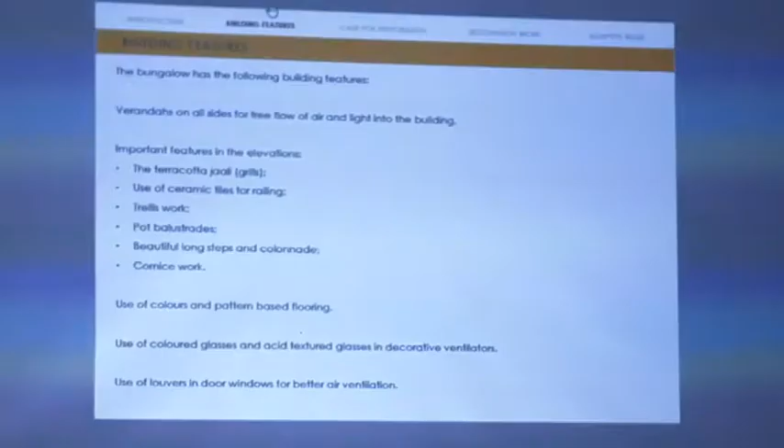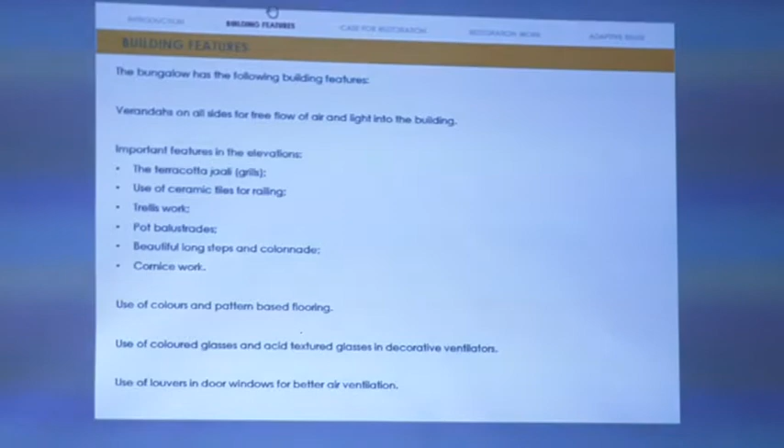Some important features of the building: there's a lot of interesting material used, like terracotta grills, terracotta jalis as we call it, which are the decorative features of the building. Then there are ceramic tiles used in the railing — those green colored tiles are also a very unique contribution. Then there is a lot of pot balustrades. I'll show you some more as I go ahead.

Then there are wonderful steps, colonnades, cornice work, and of course the lime plaster, which is an excellent material for such buildings. There are a lot of pattern-based, color-based floorings in the building which are very unique — you don't find them easily in this part of the country. There are some colored glasses, patterned glasses, and louvers in the windows which allow good ventilation from all sides.

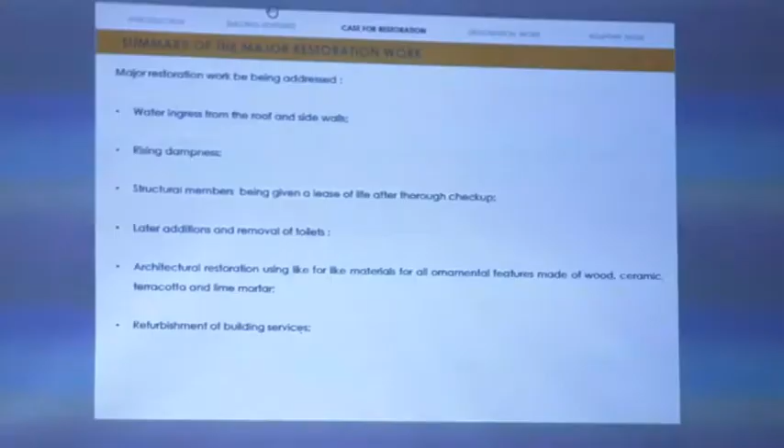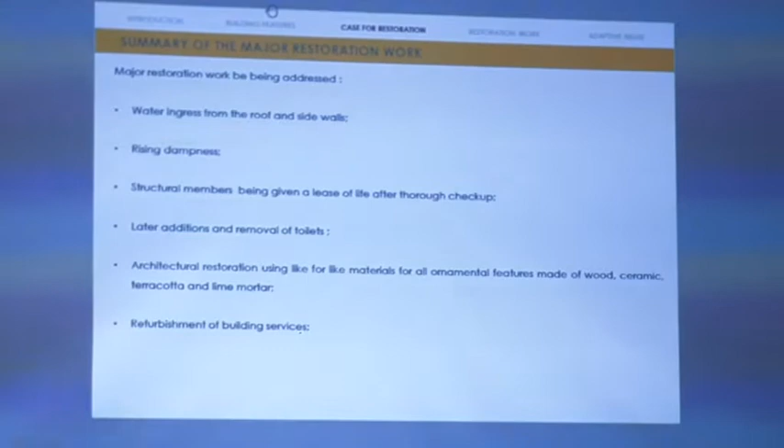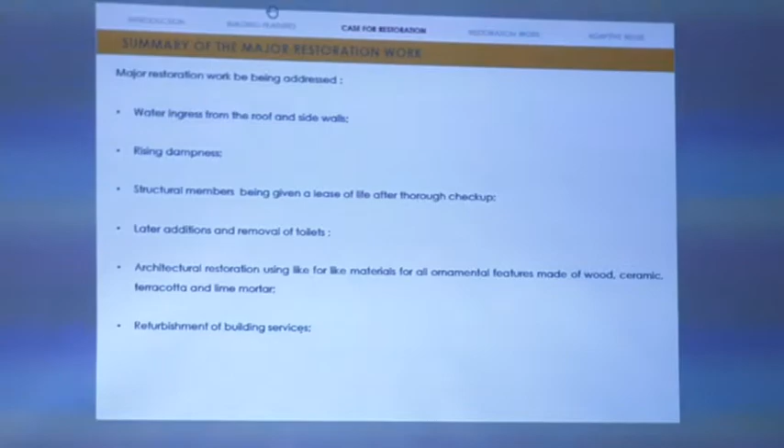So what are we doing, what are we addressing? We analyzed, we made a study, and we analyzed the problems shown here. There's water ingress from the roof and the walls, which is a very common problem if they are not maintained. And there's rising dampness, which is very commonly seen in Chennai, especially because of the clay soil.

In Madras Club also we have this problem, and many other buildings I've seen in Chennai have this problem. It is not a very easy problem to solve, it has no ready-made solutions. But we have to tackle this problem in a step-by-step manner, which we will try to do.

There are structural members made of wood and bricks, so these have to be repaired. I think the major restoration work was taken up in the 1960s — that was a major one, and we see traces of those works now that we've taken up the work. There are some steel additions, some RCC additions, a lot of things that we see. We don't know the exact dates, but there was a major work which has happened in the building.

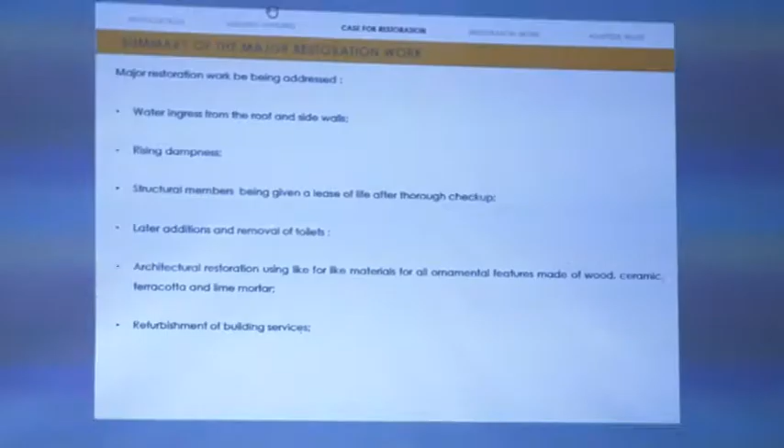There are some toilets which were added. Actually, the building was not designed to have toilets, but as you know, it was being used as a residential quarter sometimes, so some toilets were added and they were causing problems — extra load on the building, extra concrete. We are trying to remove the toilets so the building goes back to its original form, and we can shift the toilets to the next building, which is an RCC building. That is our plan.

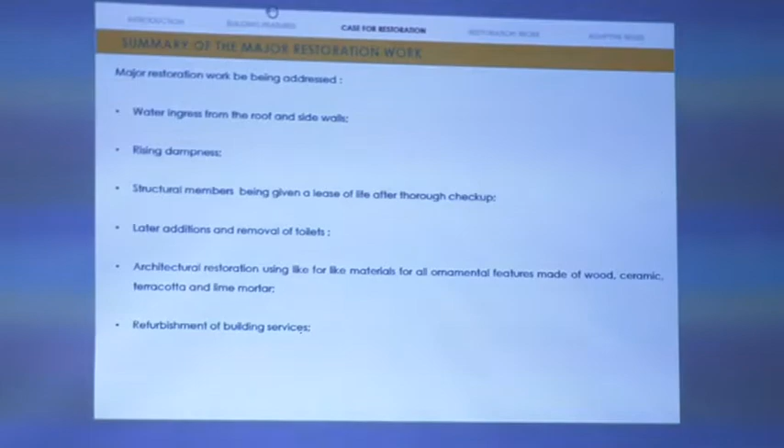And there are architectural features which need restoration on an as-is, where-is basis, like for like material. In conservation, we try to stick to the same material as far as possible.

Then, as we all need these buildings, we need the utilities. So electrical, plumbing also is a major work which is happening, and that depends on the use of the building which is going to happen. There is a use plan which has been made, and accordingly the work is happening.

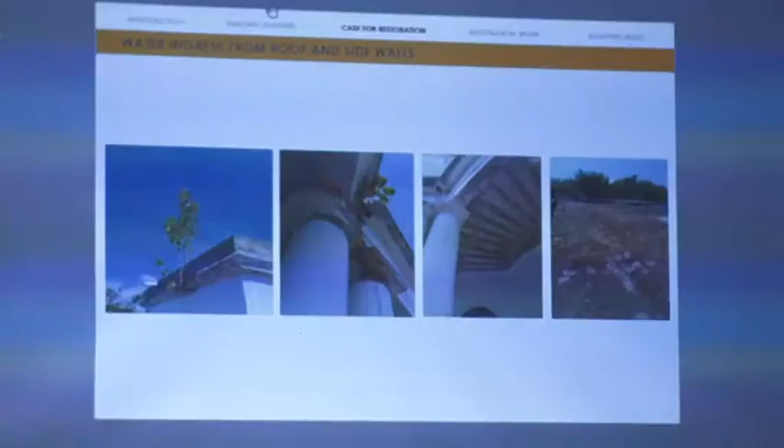So these are some of the problems. When we went to site, we found vegetation growth, which is also a cause of water ingress. The tiles on the terrace are broken, they are leaking, and there has been a lot of work happening on the terrace. I found a record where it says in the 1960s there was some bitumen applied on the terrace. So a lot of work has happened on the terrace which we don't know about until now. When we open up after 15th of January, we will know exactly what work has happened in the past on the terrace.

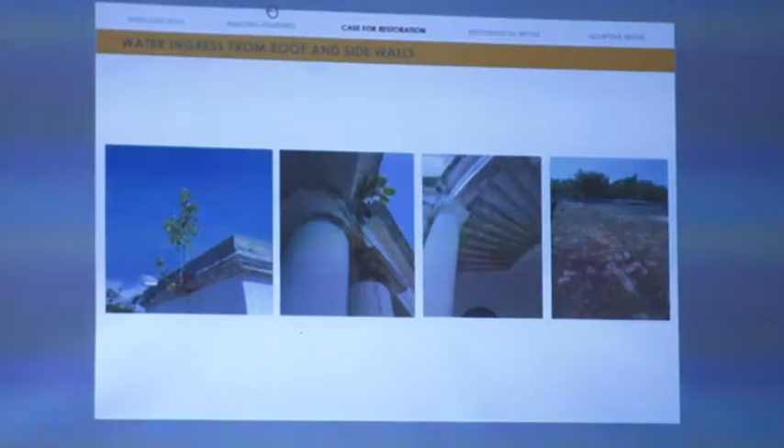These are the water issues which we have to handle — stop the leakages from the walls, stop the leakages from the roof. This is a major work, and we have not yet started the roof work; we will be taking it up after 15th January. But we have started the structural works.

This is one more issue I told you about. Rising dampness is not an easy problem to solve. This requires a manifold approach. We have to take a number of steps, and we are working on the issues. We have to collect the rainwater and take it away from the building - that is the crux of the issue. And if the problem still continues, then we have to find some more solutions.

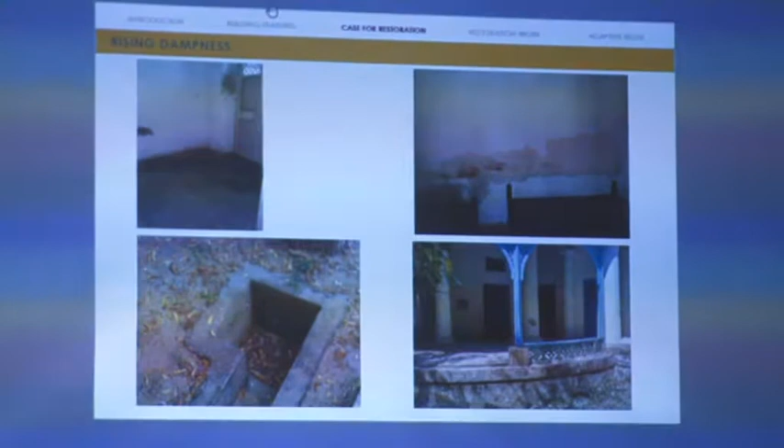There was cement plaster added, which caused a lot of trapped moisture inside the walls. Trapped moisture looks like a simple thing, but it's not at all simple, because it weakens the walls - the pore pressure weakens the bricks, and thereby the bricks give away, and the structure itself fails. There is an example in Pondicherry where a building recently collapsed - it's called the Mary building. One of the reasons was this kind of dampness continuously happening in the building.

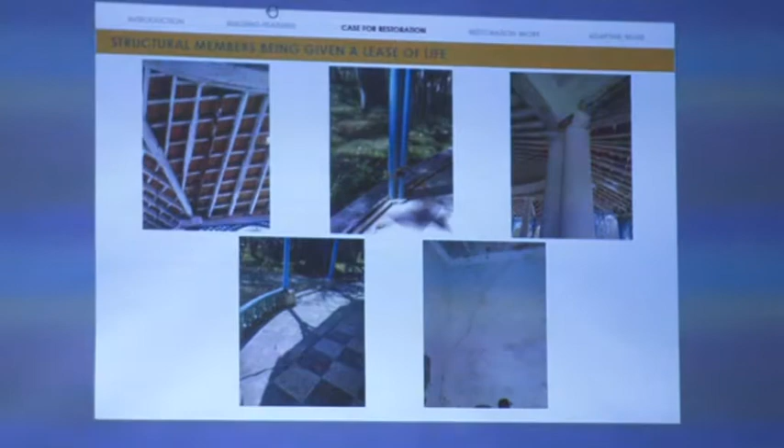Now, the structural members - the work happening right now - we have been replacing all the bad members and repairing them based on conservation principles. These toilets we are trying to remove, and we are trying to get the building back to its original shape.

There is a balcony which was added later. It's a timber balcony with steel members, and we had to remove it because it's not part of the original design.

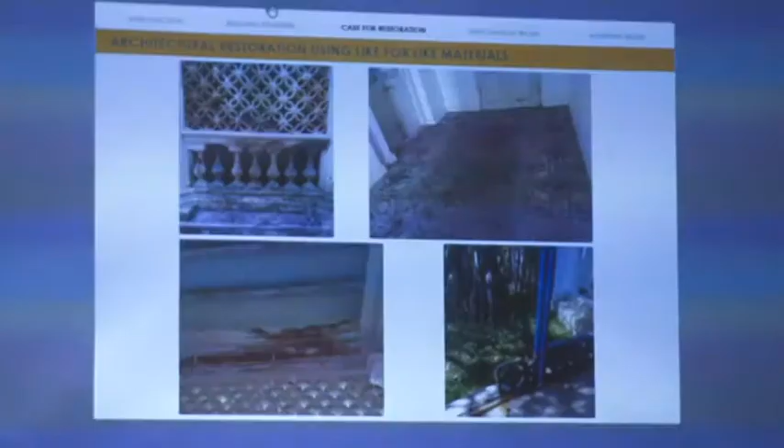Then there are these architectural features that are very unique to the building, and we are trying to restore all of this. These are the utilities, the toilets I mentioned, and we are trying to shift the toilets out of the building into a new RCC building which can take these kinds of facilities.

So these are the steps that have been taken by us. And during the course of the work, we found the foundations also required some strengthening.

There was soil consolidation required because the structure added behind the building - there is a porch behind the building - was not made with the original building. Of course it was added later, and the foundations were not sufficient enough to take the loads. So we saw some signs of cracks and settlements when we started the work. That part of the work we handed over to experts who can handle the soil consolidation - he'll be talking about that.

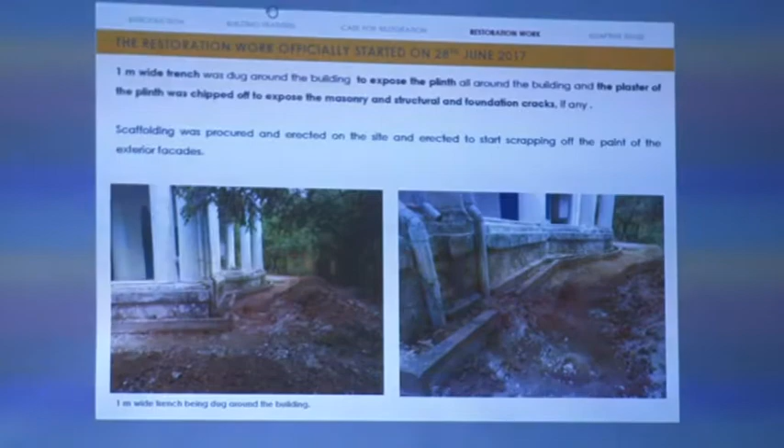So this is our approach to restoration. We'll go into details now. Work was started on 28th June. We started by removing all the extra soil that had gathered around the building, so as to expose the plinth as much as possible, so it can breathe easily.

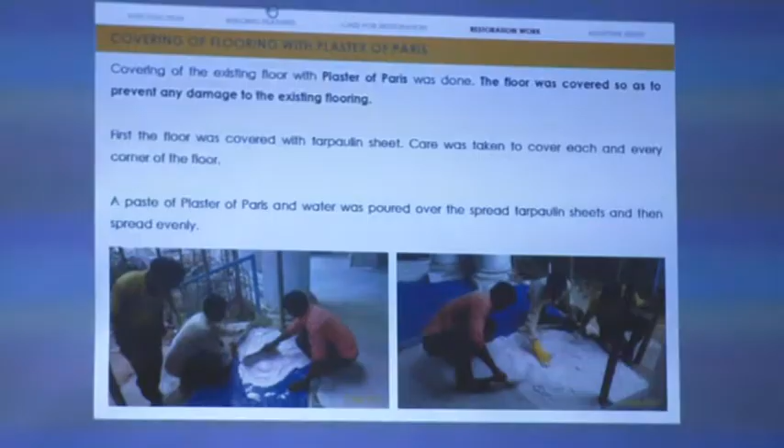Now, when we take up an old building, it's like handling an old man - it has to be handled very carefully. Basically, it's a kind of surgery that we are doing, so a lot of precautions have to be taken. We try to cover up all the old precious material and preserve it so that we don't damage it during the course of the work.

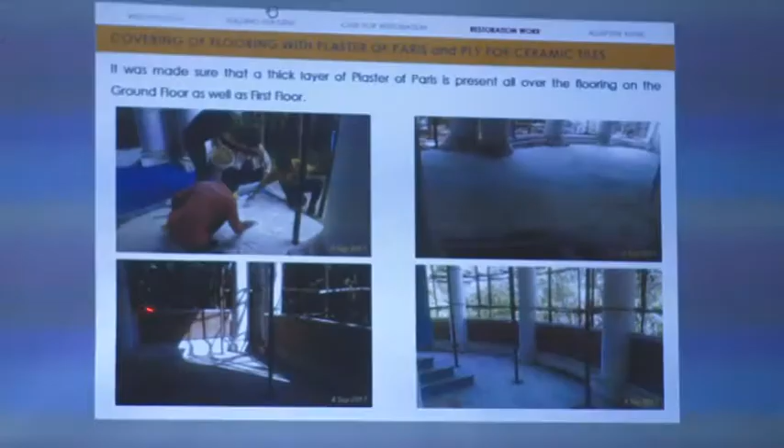So some of these things like POP, we put on the floor to protect it while working. This plywood is meant to protect the ceramic tiles, which are very unique and an example for the country. So we are trying to see that we don't damage the building further while working.

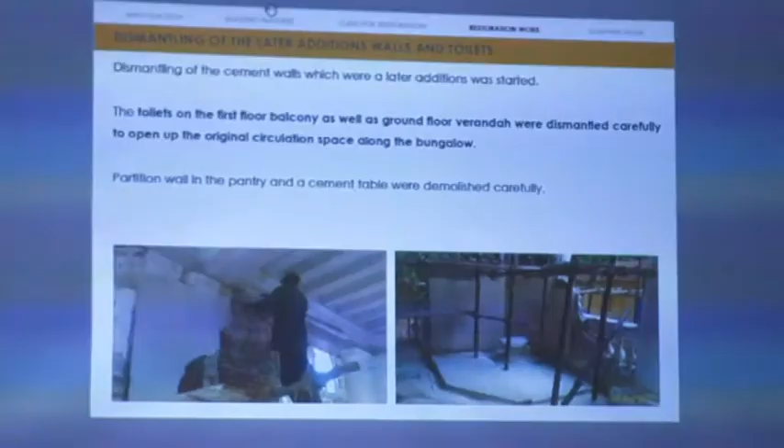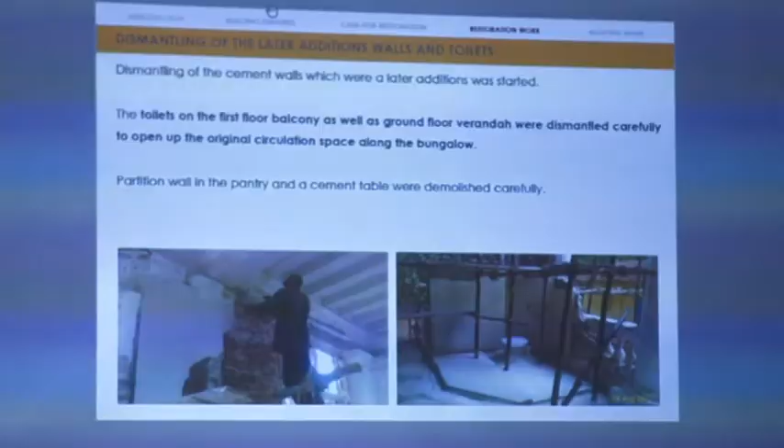These are the toilets and extra walls which were added because it was used as part-time accommodation. Unnecessary load was there - a lot of brickwork, tiling, concrete. We removed all those things. Now the building is back to its original form.

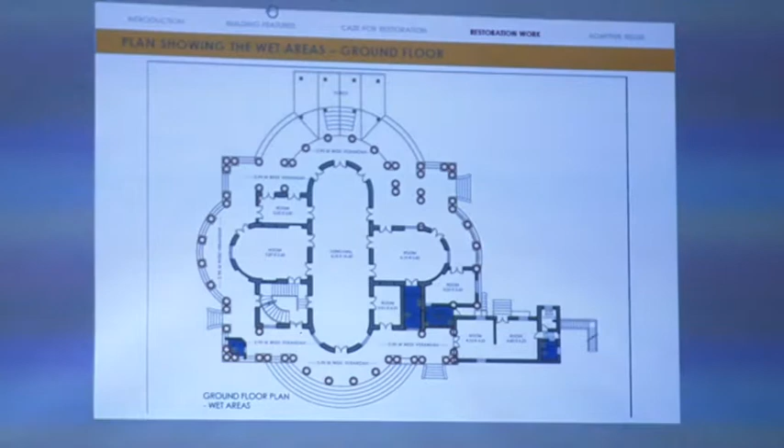See, these blue things you see are the things on the ground floor that were added - the toilets. They were stopping the circulation of the building. Actually, the veranda is connected on all four sides, but due to these toilets, it was blocking all the ventilation and passages. So at present, we have removed that, and now there is good circulation - it is back to its original form.

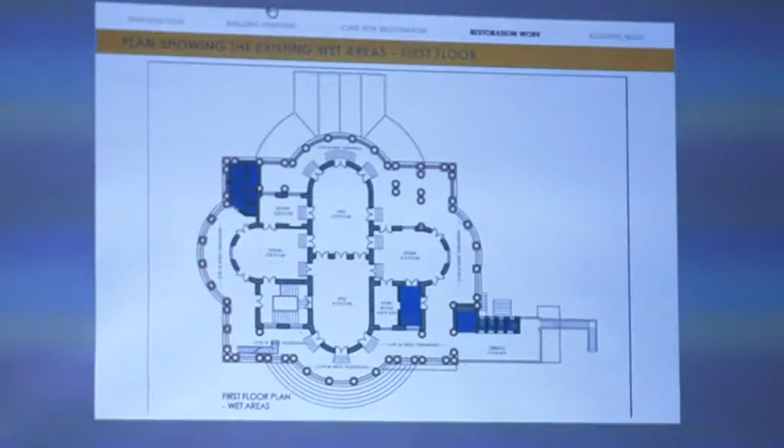This is on the first floor, there was a toilet here. And this is the block I was saying we'll shift all the toilets to this side. So we have removed this, and now the building is back to its original form.

Now there were some cracks, as I said, on the rear side where that porch was added, and the foundations were insufficient. So we had to stitch the cracks by inserting granite lintels. This is one technique to stitch the masonry, and grouting under pressure with lime-based slurries, so that the wall and the plinth is consolidated, and the soil has to be tackled now.

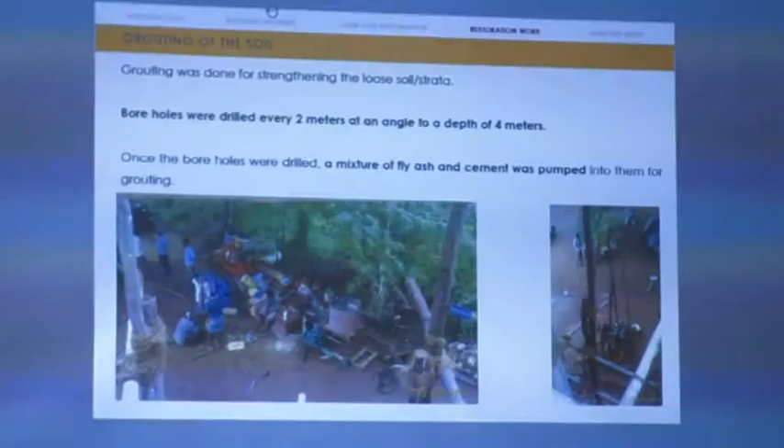This is the soil consolidation work which happened, and Mr. Narasimhan knew a few experts in Chennai who could undertake this soil consolidation, so he'll speak about it. That is also a very interesting thing which has happened in this project. He has been with us as a project consultant right from the beginning, coming almost daily, maybe thrice a week, and has been guiding us quite a lot. So I'll request him to speak a few words about this grouting and consolidation of the soil.

Good evening, ladies and gentlemen. This building, when we came and saw it, and started removing the unwanted material all around, and then looked at the plinth, we found a lot of vertical cracks in the plinth area towards the foundation.

To ascertain how deep it had gone, we dug in several places up to the bottom of the foundation and found that the cracks were going directly up to the bottom. Of course, those cracks were stitched and repaired by Mr. Nilesh Thakkar, who showed that granite slabs have been inserted and done.

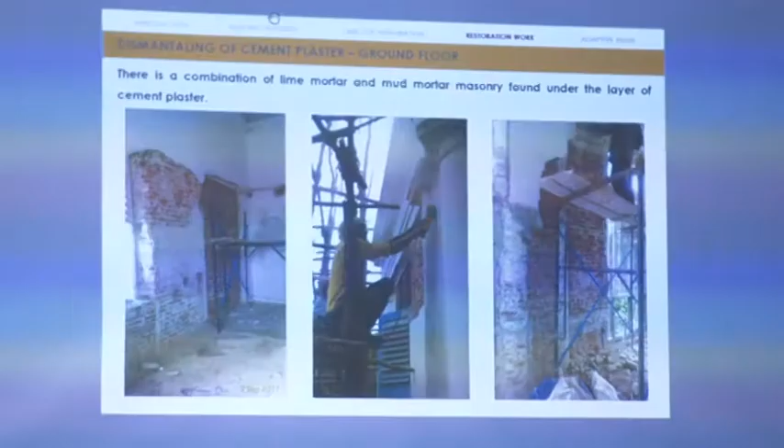So we had to carefully cut the plaster before removing it, so that there are no vibrations to the old building. So these kind of small things, they do matter. See, he's cutting the plaster with a machine, and then only he is chipping off the plaster. This avoids vibrations on the building.

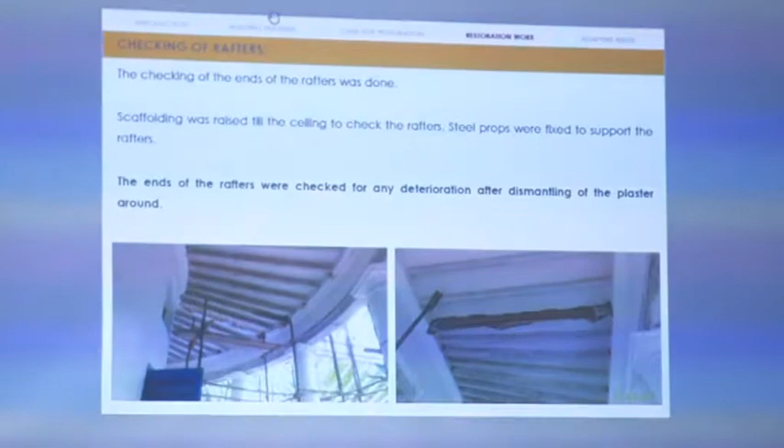Now we come to the wooden rafters. A lot of rafters in this building were not in a good shape, and we had to replace a lot of them. So we had to check each and every rafter. There is a wooden rafter, as you notice in the ceiling, which transfers the load to the wall and the pillars. If this is not in a good shape, there are chances of collapse. Of course, 1 or 2 here and there doesn't matter, but if there are many which are failing, then there's a good case for collapse.

So we had to check each and every rafter. We went about opening all the rafter ends on both sides to check whether there is wood rot happening. If there was no wood rot, we had to leave it alone. If there was wood rot, we had to do some things which I'll show you. And we had to also do a hammer test on the rafters to check whether the rafter is in a good shape or not. So these are some of the things that we had to do to take care of this.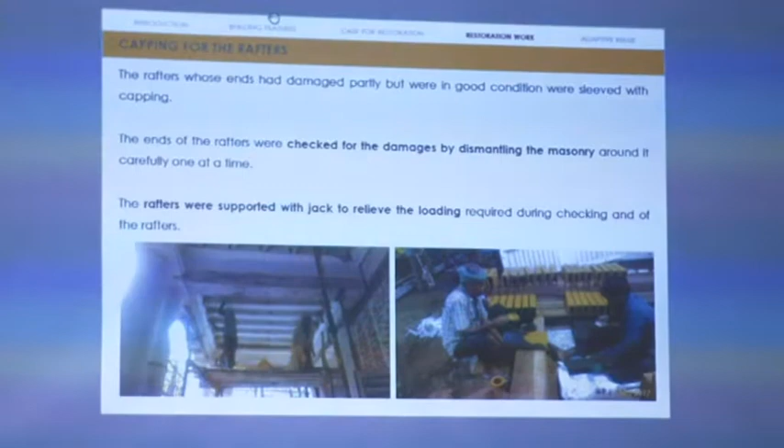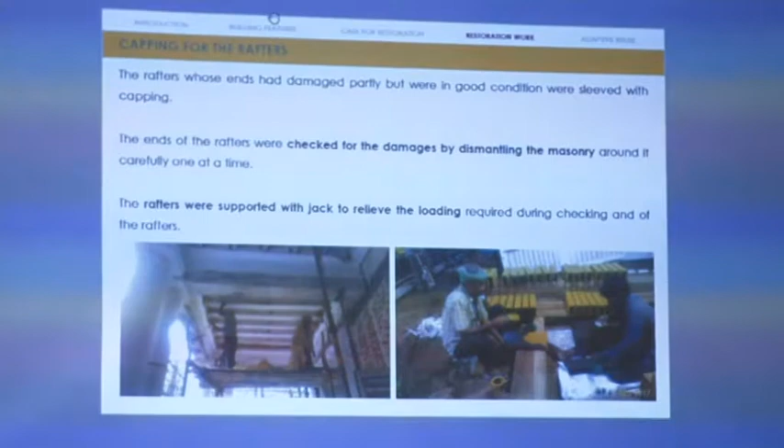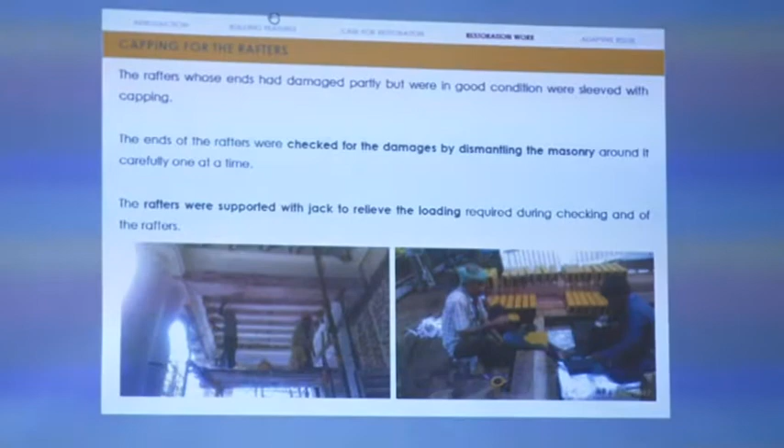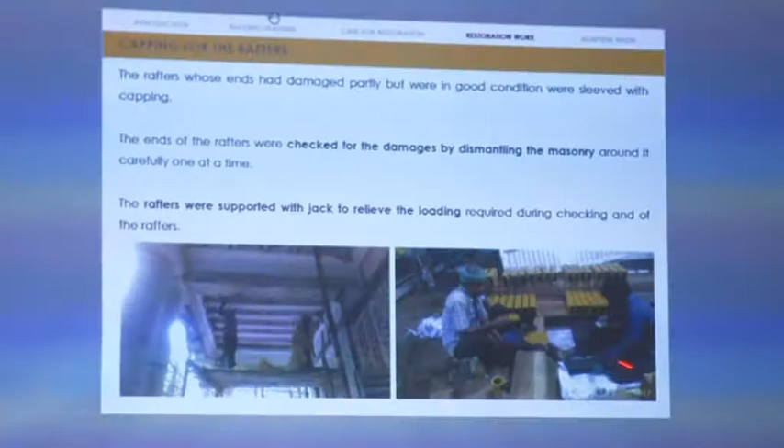See, this yellow thing that you see is a sleeve which we insert if the wood is rotted at the end. Why should we replace a rafter if the end is only rotten and the rest of the rafter is good? Let's say 80% of the rafter is good and only 20% on the end, which is usually the case because moisture in the walls attacks that end only. So this is a very nice technique to save that rafter. We insert a sleeve at the end, as you see it here. This takes care of the structural part - it transfers the load onto itself.

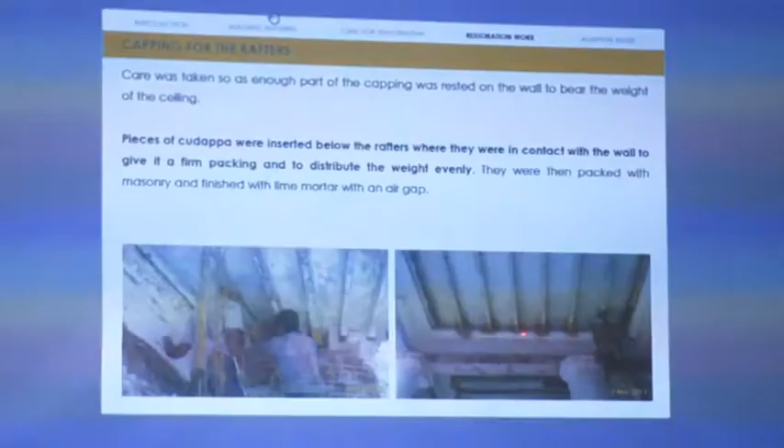And we also leave an air gap, as you see here. After the sleeve is fitted, we leave an air gap, whether it is wood or steel. It should breathe, so that if there is any moisture coming near that rafter, it should come out or evaporate. So this air gap didn't exist before, but we have introduced it and it works well.

So this is one of the techniques, how we have repaired the rafters. The other technique is, of course, if the rafter is bad, we have to replace it 100%. We cannot save anything from the rafter, then we have to go for a 100% replacement.

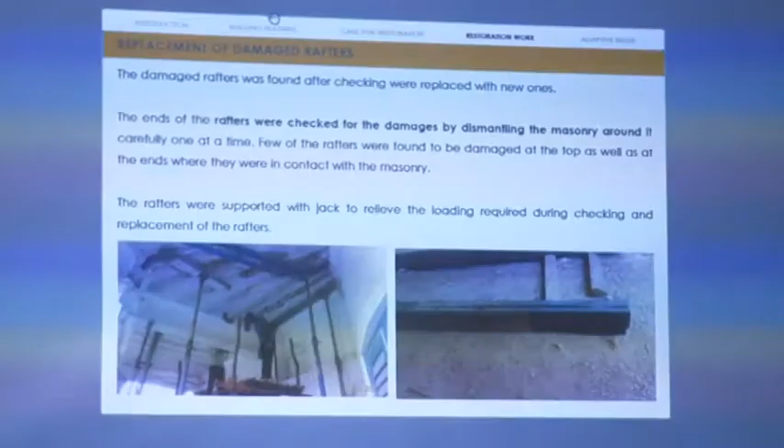This is the third technique that we have used. Let's say if the rafter is 50% gone and 50% is good, what do we do? We try to recycle that 50% by connecting it with another 50% rafter. This is what has happened here. It's a traditional joint, Kerala style. Our Kerala carpenters are very good at this, and it doesn't require any nails or screws or anything. It is just joined to another rafter which has been dismantled. So we try to recycle as much old wood as possible so that we don't spend more money buying wood. Each and every piece of wood is recycled back into the building.

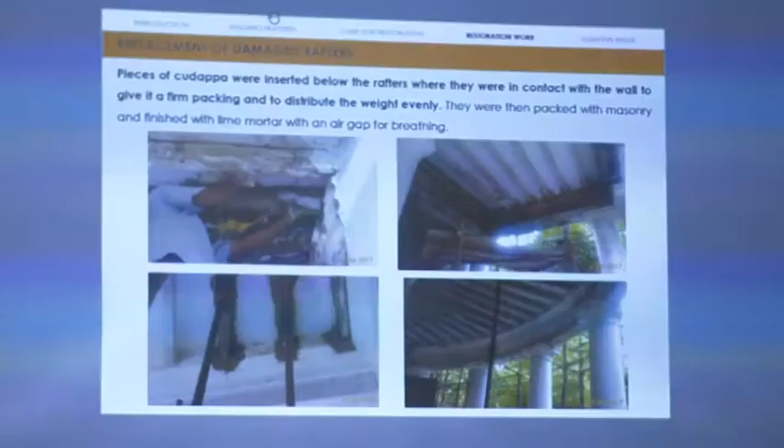And we insert one cudappa piece. As I told you, we leave an air gap, plus we insert a cudappa piece. There he is inserting that cudappa piece below the rafter, which is another precaution we take so that the brick doesn't get crushed below the rafter.

Now the restoration of the wooden beams. This was a major challenging work for the building as such. Replacing a rafter is very easy, but replacing a wooden beam of this giant size has to be lifted and put over there. So it's a very challenging task, and some of the beams are not even straight, they are in an arch shape, in a circular shape.

Our carpenters are good at handling all this. This is the circular beam I was talking about. See the condition of the old beam? This is the condition of the old wood that we found.

I have an account of how many beams and rafters have been replaced. I will show you.

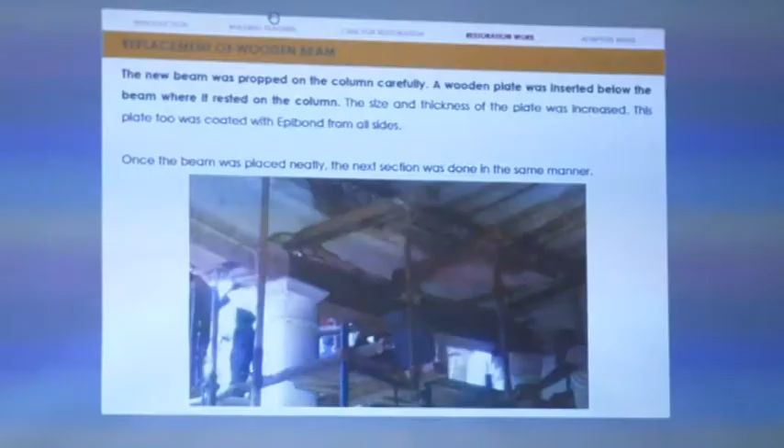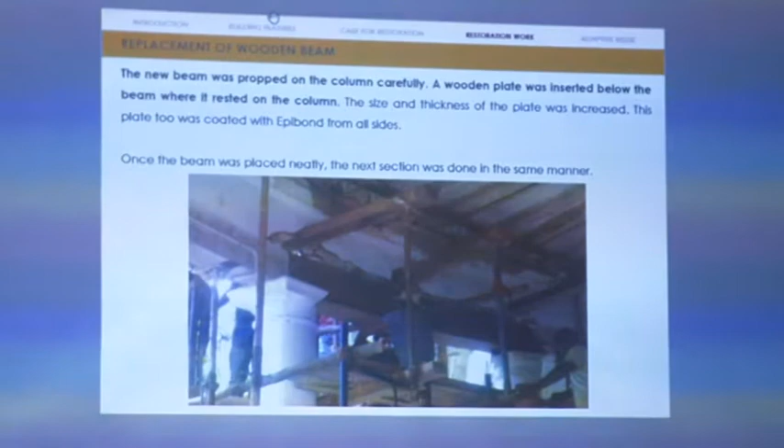Of course, all this wood has to be treated with anti-termite and painted at the end so that it does not absorb moisture. We apply a bitumen paint where it comes in contact with the wall and the ceiling. So these are some of the extra precautions.

These are very interesting things. You don't see these easily in old buildings. It's a very unique thing here. And these balustrades also are very unique that you see.

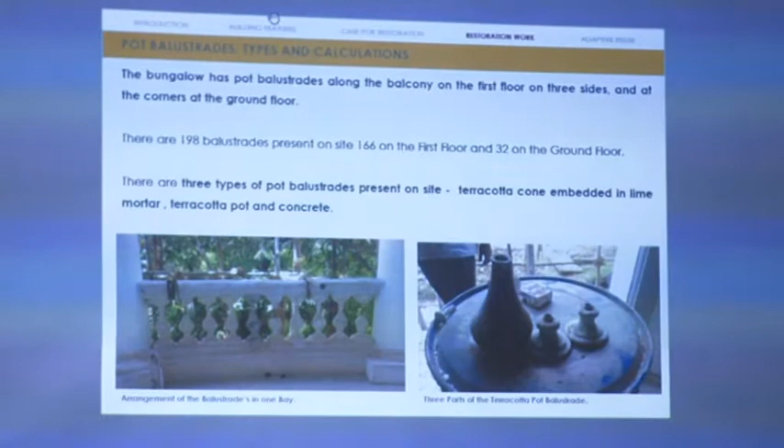There are 3 varieties, and we had to select which variety we should restore. So we found the majority of them had this terracotta insertion - a terracotta double cone inside the baluster. This is one variety we found, but these are the major ones. So maybe these are originals, and this is then plastered with lime.

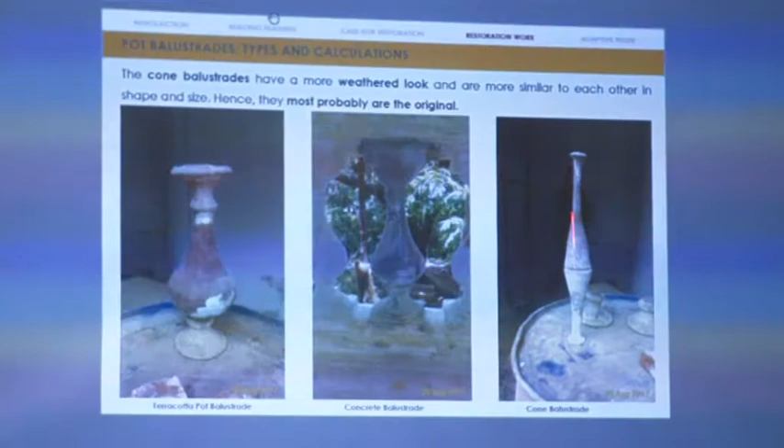So we chose to go for this variety, and whatever restoration we are doing is in this style. This is the baluster work which is happening - it's all lime mortar, coir ropes, and terracotta. These are the terracotta grills which are being restored.

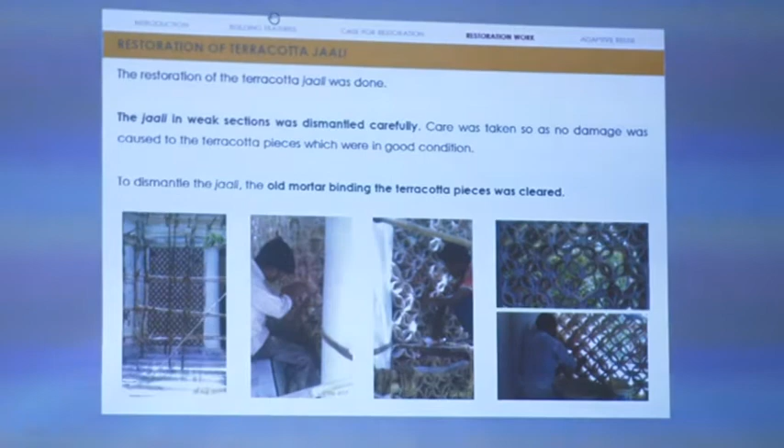Fortunately, we didn't fall short of any terracotta grills. We could recycle most of them.

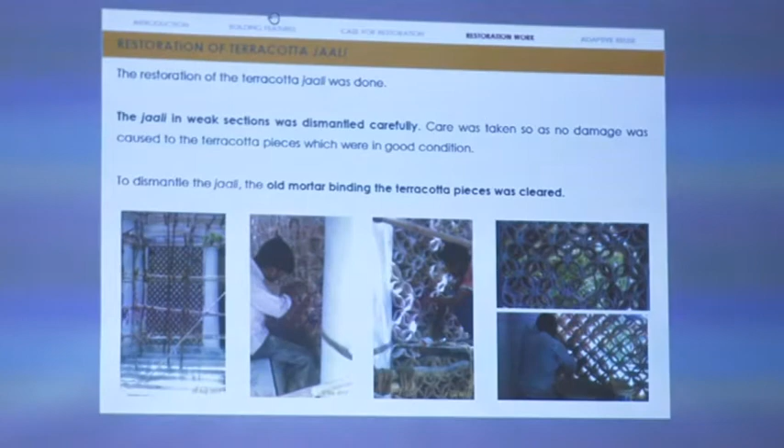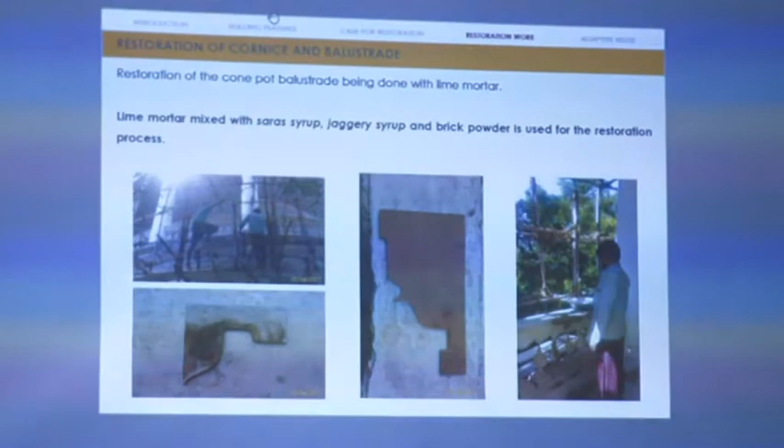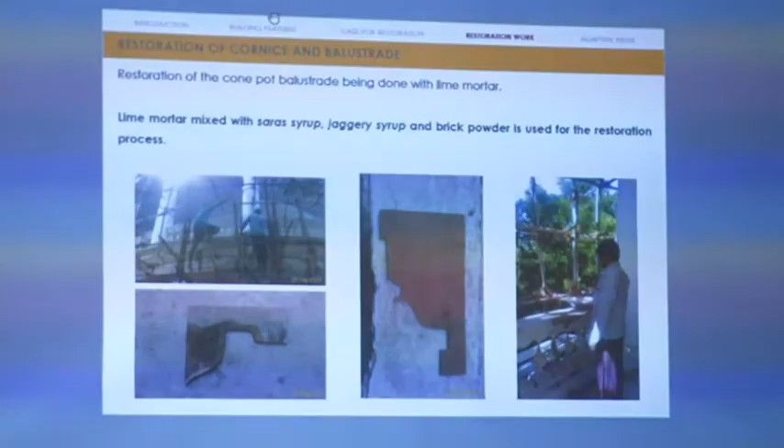These are the templates that we make for creating some cornices and moldings in lime plaster. This helps us in retaining the exact shape of the lime plaster. And this is how the lime plaster is made.

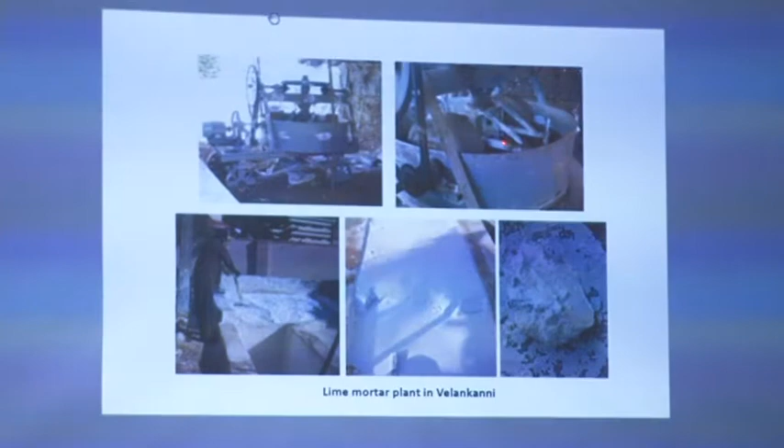We have a plant in Velankanni where we are working on the Velankanni church. This is a grinder which grinds the sand and the lime, and the lime is prepared in this fashion. It is slaked under water, it is filtered, and then it is put into the machine. This machine, depending on the use, takes almost 15 minutes to make the lime mortar, and then there is a process again before using it. But this is the basic technology.

In olden days, this is how people used to make it. We have one more plant in Anegundi near Hampi, which is bullock-driven. So that's a real old-fashioned lime mortar machine we have. That makes a better mortar actually than these kind of machines.

We have not started this yet, but I'm showing you that we will be doing this kind of traditional waterproofing using lime and brick pieces on the terrace. It works very well if it is protected with clay tiles, and has a much longer life than cement waterproofing. So this work is yet to happen - hopefully it will happen during the month of January.

So these are some of the works that we are doing, and we'll be doing much more, but right now I don't have any slides to show that. If you have any questions, I am happy to take them. Thank you.

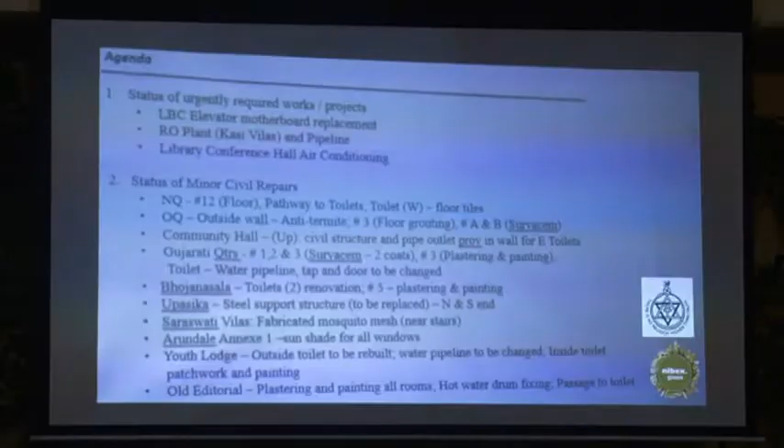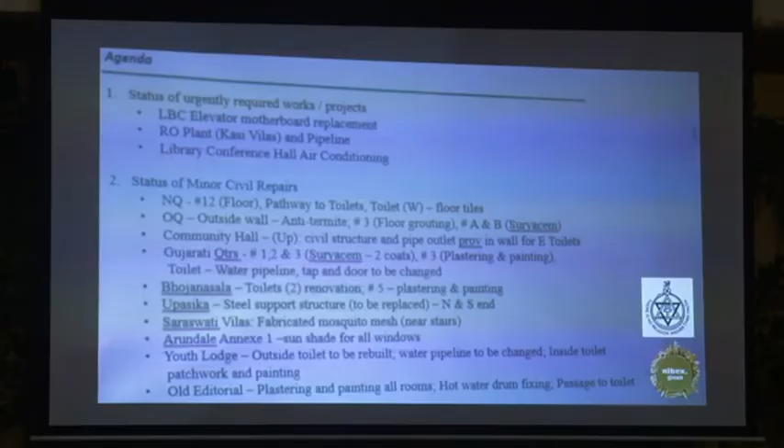For each meeting of the subcommittee, he presents an agenda which, through his laptop, is projected on the wall so that everybody can follow the proceedings. For the members of the subcommittee, it is clear what they need to do. For example, he would ask, 'What have you done since our last meeting? How is the progress of the project? Do you need more money or more time? And when are you able to finish it?'

After the response, it moves on to the next subject. Mr. Jai Kumar also draws up the minutes of the meeting, so the to-be-done tasks are clear and all know what to do. The minutes also indicate what amounts of money are required for the various budgets, so we can pass these on for the President's sanction.

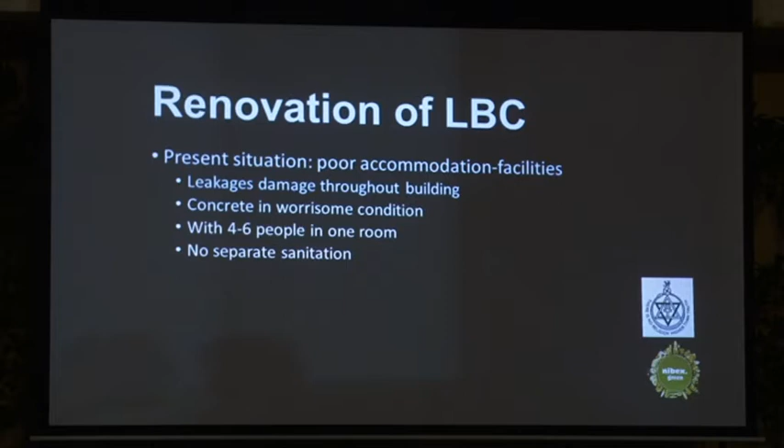The present situation is poor accommodation facilities. I think everybody who is a guest in LBC knows how it works: leakage damage throughout the building, concrete in worrisome condition, with 4 to 6 people in one room, without privacy, no separate sanitation.

What are our possibilities? Well, renovate the whole building, divide the big rooms into 2 smaller rooms, convert the old staircases into bathrooms for the new rooms. This monumental and wonderful looking building has serious technical and structural issues.

Addressing the problems now will avoid structural problems in the future. I will show some of them. At times, 4 to 6 people are allocated in the same room. The guests, however, prefer a maximum of 2 persons per room and require a proper private bathroom with clean, warm water from the shower, not out of a bucket.

So if we have to renovate the building for technical reasons, and we have to do that, we can also modernize it to a basic standard at the same time.

It starts with leakage somewhere. Then the steel in the reinforced concrete starts rusting. After that, you see small cracks, because rusted steel expands and is bigger than steel in good condition. The rusting continues and the cracks become bigger. Consequently, parts of the concrete will fall.

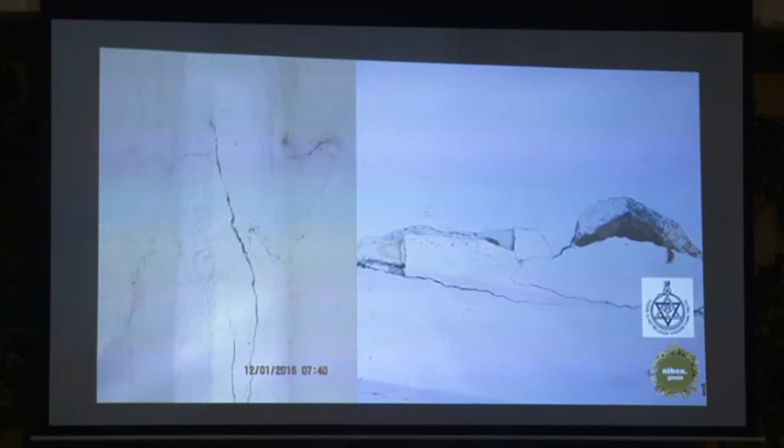Bigger parts of concrete will continue to fall. This will result in the steel being fully exposed and rusting even faster. So the whole structure of the building will be endangered.

For those who are staying at the LBC now, don't be afraid, and do not panic. For the time being, we are still far from this critical situation. But it shows you that now is the time we need to start with the renovation. Waiting and delaying will only result in higher costs.

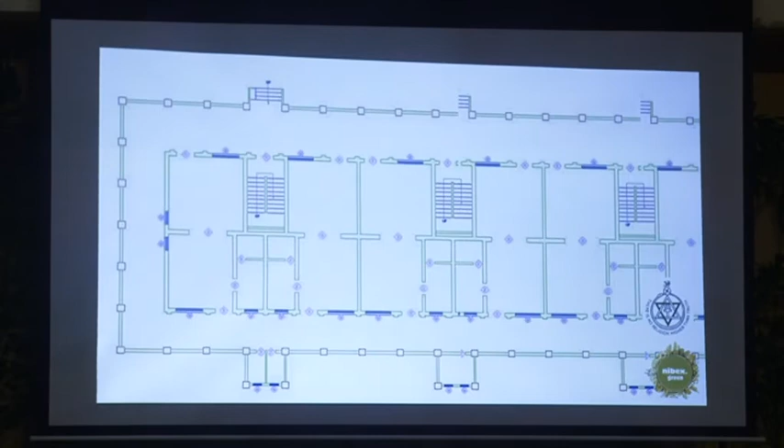And once we are renovating the building, we should also improve LBC's accommodations. Here you see the floor plan of the floors of LBC: big rooms en suite with a primitive bathroom, and on the riverside you see the unused staircases.

Did you know that were staircases? We have lots of them, but we never use them. These are the rooms, this is the bathroom, and here you see the not-used staircases, which we can change into bathrooms.

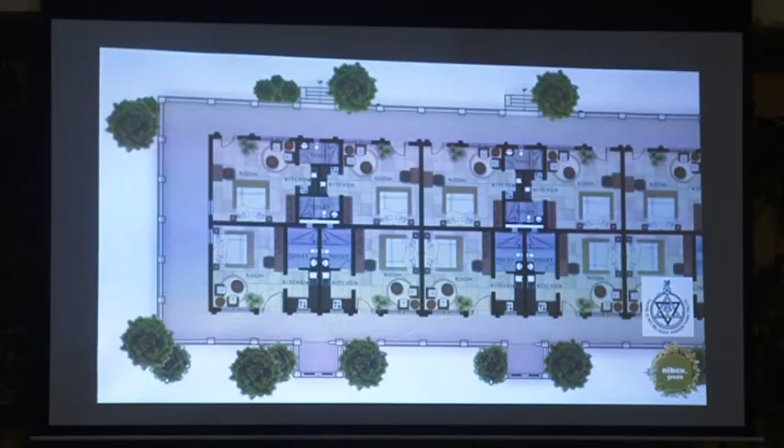The new plan divides the big room into 2 separate rooms, and every room has its private bathroom, partly located in the very same location where the staircases used to be. This means that new staircases on both ends of the building need to be constructed.

With this renovation, we double the number of available units from 28 to 60. That's a little bit more than double, because downstairs they use them, we use them also, and enhance their durability, quality and basic comfort. I must underline the word basic, since we have by no means plans to convert LBC into some luxury hotel.

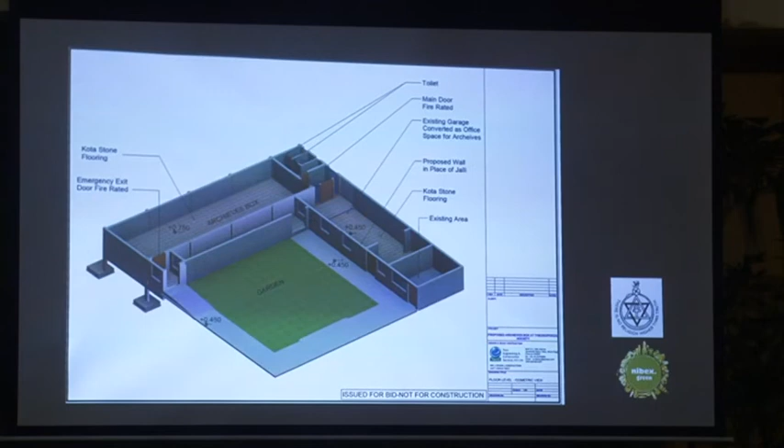A new archives box could look very much like this. The green part is the atrium garden of the library. On the left side, you see the archives box — that's the newly erected archives box. On the right side, you see the offices, which will be located in the vacant part of the existing library building.

We would like to start this mega project in 2018, this year, depending on the money available. We still need some $30,000, and of course permission from the government. It looks like I'm always begging about money, but if you have plans, you need money. It's clear like that.

Plans for the future. It is time to think about the next 5 years plan. We have lots of ideas, but not yet worked out. I could do like I did last year and give an overview of the amount of work done by the local team, but I won't. Instead, I will share with you some possible future ideas.

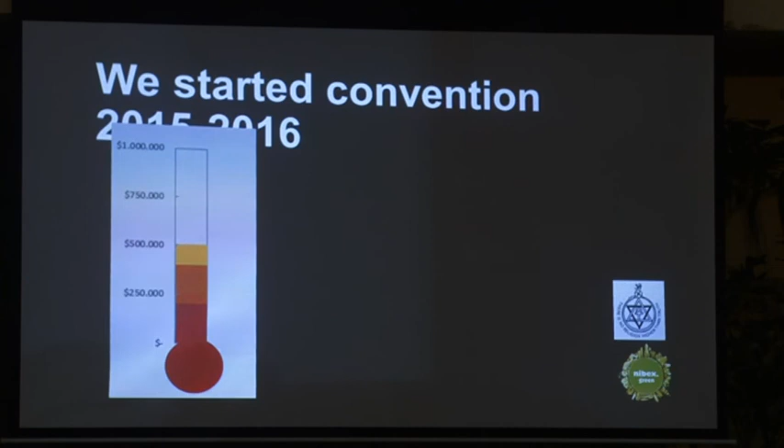Now we have to say a little bit about fundraising. Two years ago, our international president Tim Boyd started at the 2015-2016 convention the fundraising campaign. The goal is to get within 5 years $1 million to implement the ideas of the first 5-year plan. We are now 2 years after the kickoff, and we have raised a little bit more than $500,000, including the promised but not yet paid money.